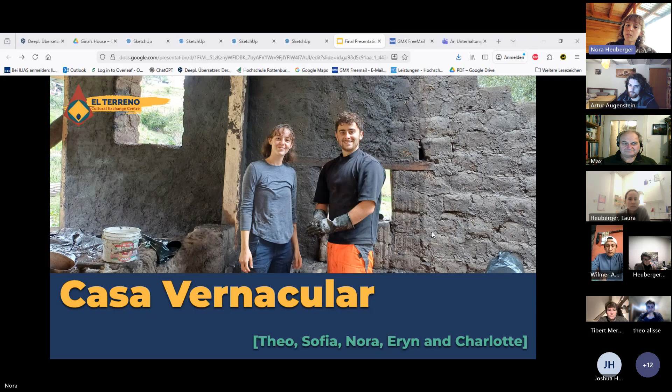I'm going to start with a quick introduction from everybody who participated in this project. It's only Theo and me today presenting, but there have been 5 people in general working on this project since, I think, the beginning of July, August. And the first person to come here was Sofia from Switzerland. She was an architect and she started the whole process of this housing project. Sadly, she can't make it. As well as Sofia, Eryn was here from England. She was an interior designer and worked mostly on the furniture that could be built inside of the house. We're going to see a little bit about that later on.

That's me. My name's Nora. I'm from Germany and I'm a civil engineer and currently doing my master's in resource efficient construction with a focus on natural materials and resource efficiency, which is mainly why I'm here to learn techniques from other cultures who focus as well on the use of natural materials and being sustainable for our future.

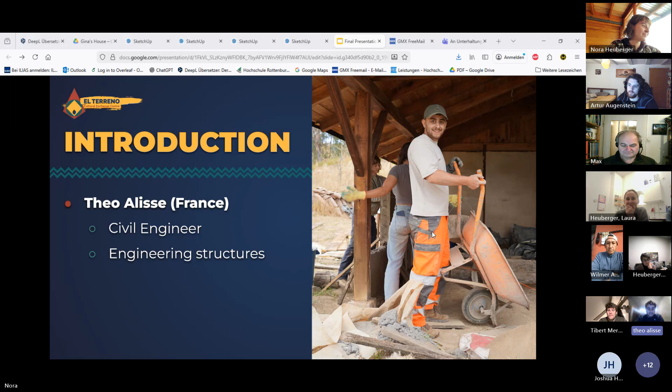So, hi to everybody. My name is Theo, and I'm a civil engineer from France. I have a diploma in engineering structures, so it's not exactly what we're doing here, but I think it's fine. The last person in the project is Charlotte, who is a landscape architect, and she helped us for a few weeks, but unfortunately, due to personal reasons, she couldn't keep going on the project. But we're grateful for her.

So the agenda of today's meeting is going to be first a little bit of context on the project. Then we are going to see our research on the local needs of local populations and how our visits helped us this way. Then the more practical research over some technical details, more engineering and architecture stuff. Then the design evolutions of mostly the floor plans and the other views Sofia designed. Then the technical development, which is mainly engineering work. Then pricing and timetable, and then a little conclusion and the next steps the future interns could take on.

So to talk a little bit about the context of the project, we are currently in Ecuador, in Guaranda, one of the very rural areas in Ecuador, where the traditional way of housing is using adobe and a lot of madera. Sorry, adobe is a clay product, and madera is the Spanish word for wood. You can see that I have been talking a mix of Spanish and English for a long time now.

So yeah, with all these challenges, we've decided to focus on making really good research, making really nice plans, and then leave some work for future interns to come and hopefully take this project further. Yeah.

So one of the first challenges we had was to define what the local population needs, because for me at least, one of the first things I realized coming here is it quite brought me back to reality, and there's still some really modest population, especially here, which maybe would only afford a house for a few thousand dollars, which is absolutely not what we're used to in Europe, of course. And so we needed to meet some people, to talk with them, to have maybe some studies of anthropology, how family works.

Can you switch the slide, Nora, please?

And just to try and realize what is their way of living, what are their traditions, what are their beliefs, how family works there, and all of those things would then let us define how to utilize the space. What are the priorities if we are building a really modest house? What is to be prioritized and what maybe will be done years later, or maybe not. And so we needed all those answers to then be able to come up with an architectural plan and designs.

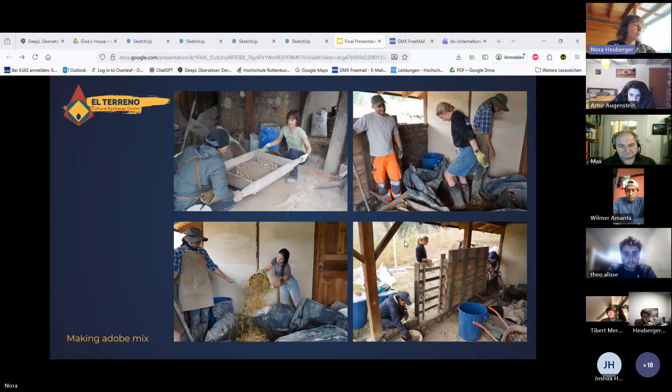And the next step then is to add water, lime, mostly horse poop and straw, and then mix it with our feet. In this case, it was Eryn and Fernando mixing the adobe mix. And yeah, in the last picture, you can see a little bit of the building site. So we had to put up different work frames because some materials can be built up by themselves. The first one, on the left-hand side, it's just adobe bricks. You don't need a wall work frame for that.

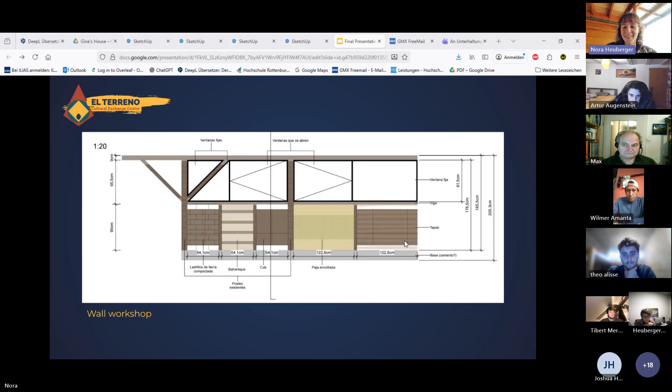But for bahareque, for cob, and for paja encofrada, and also tapial, you need a work frame. So this is what you can see in this picture. And in the end, it looks more or less like this. So the first one on the left-hand side is adobe bricks, which we found was the fastest, but you would need experienced people. Best case scenario, you need builders to build these kind of walls for precision and a very good outcome.

The next one is tapial. It's just rammed earth. So a really great method to just use the soil you have on hand at your building site. Then the next one is paja encofrada, which means it's a compacted straw and clay mixture, also kind of rammed into a working frame. Then it's cob. No, sorry. First comes bahareque, which is also a straw and clay mix, but it's put on top of a skeleton, which makes it pretty fast.

And the last small wall we can see is then cob. It's the same mixture as before, but brought into layers, which takes quite a lot of time to build up. I think in the end, it took me about 2 weeks to finish that wall because you have to wait for the layers to dry, which makes it obviously not as useful because it just takes a lot of time.

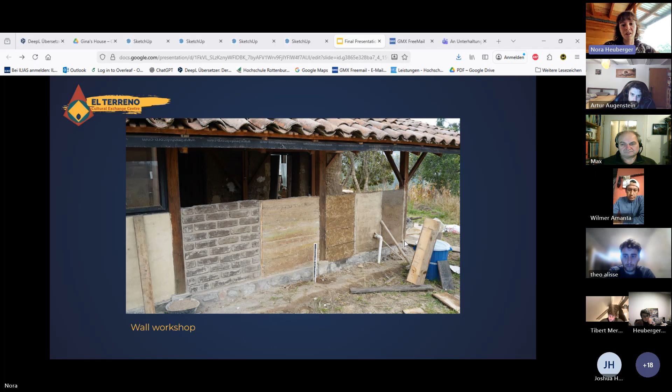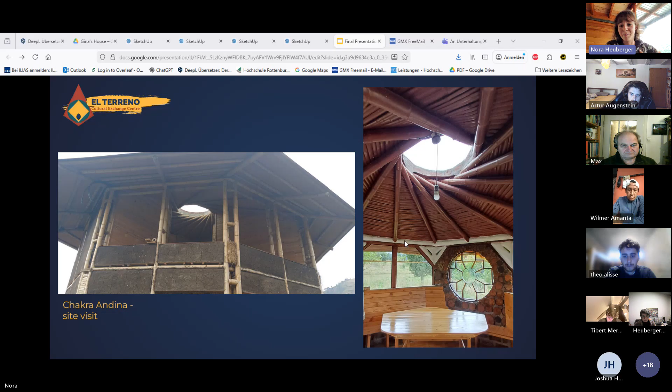Besides the physical work at the wall workshop, we also visited Chakra Andina, which is a very nice place close to Riobamba, where they have built several lodges for tourists using bamboo and tapial, a lot of natural techniques, which was very inspirational to see and very beautiful, in my opinion.

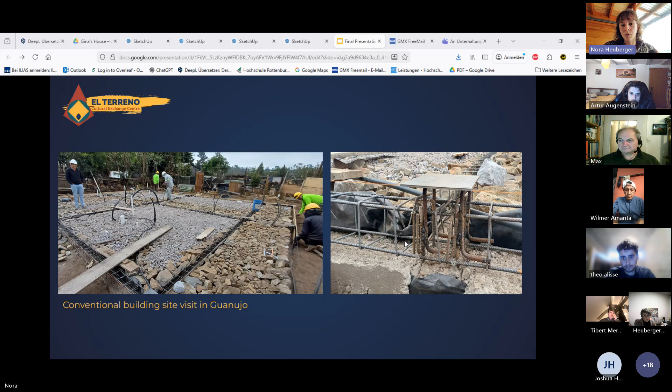Also, we visited some building sites with some engineers from Guaranda. This is a building site in Guanujo, very close by, where we could see how they built their foundations here, using a lot of stones they just have on hand at the local building site, which means they can reduce the use of concrete. And the right picture is showing a connection between a pillar and the foundation, which makes it really safe for earthquakes, which is something we have to keep in mind in this area.

Then I spent a lot of time at Daisy's house. Daisy is Wilmer's cousin, and they are rebuilding this, I think, 150-year-old house made of adobe. And I spent about 3 to 4 weeks there to help them build the roof, which was very exciting, to see them doing this very simple connection, you could say, but all with their hands, not a lot of machines were being used. And that was very, very exciting and very instructive for me.

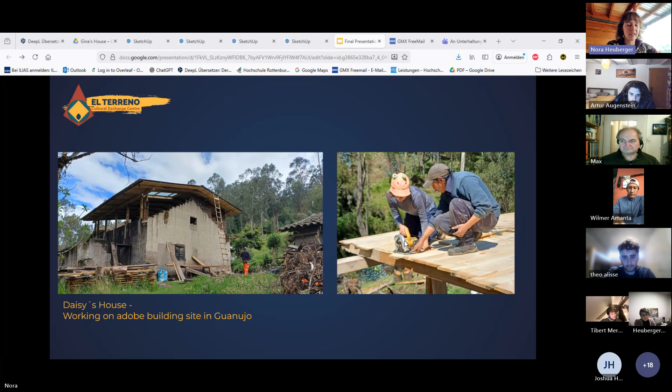This is one of the connections between a pillar and a beam. Yeah, it takes a lot of practice. I tried to do the connection by myself. I failed. It was really nice to see the maestro doing it very easily.

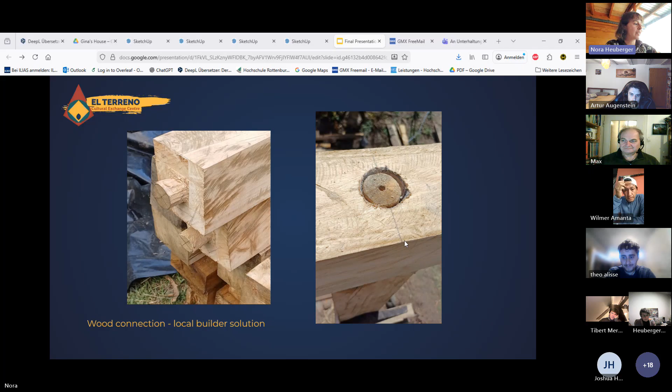Yeah, that's how the connection looks from the side. So this Z kind of connection is there to really be able to hold together in case of an earthquake. And the wood didn't fit really well together, so they just used cement to fill in the gaps, which was something very new for me, but seems to work.

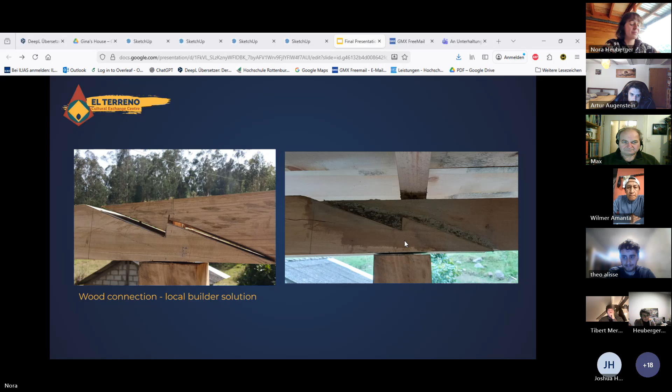Yeah, and there was more work like nailing roof planks on the roof beams, and on the right side you can see Theo finishing up some adobe walls.

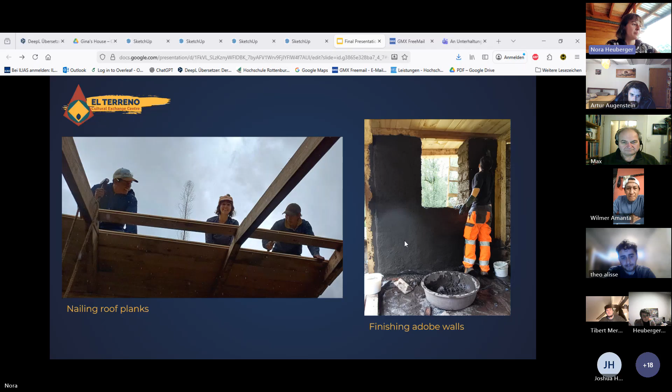Yeah, can we go to the next one straight?

So on the design evolutions, of course, as Nora said, the first intern that was here was Sophia, and Sophia was also in architectural studies, and she was the one designing the first floor plans. So that's what they look like. There's the floor plan on the left, and there's some views on the right. And as you will see later, the structure is globally the same.

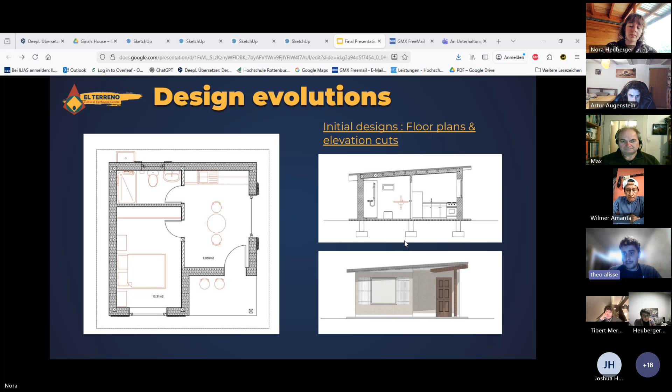So the idea was to have a 6x6 house with a pillar every 3 meters, which would make it square and modular, so that we can then adapt really easily to any sun orientation, anything, like maybe if the view is nicer east, the orientation of the house would be different, and all that kind of stuff, so that we could keep really one model and adapt it to every family that needed it. That was the initial thought.

Can you pass it, Nora, please?

And then our anthropological studies taught us many things, especially that, unlike maybe in our countries, several generations of a family would usually live together, which means that, for example, if the base target was only a couple with 2 children, now you probably need to add maybe a grandmother, maybe a grandfather, maybe both, which would mean you need more space, or at least you need to maximize the number of rooms you are going to have in this space.

Also, we learned that families are meant to grow, and when families are growing, people are not necessarily leaving the house, which means you again need some more bedrooms or some more space for maybe another little family, which means you might need to extend the house. What we have seen here is a lot of reinforcement in the pillars, or left open, so that maybe years later a family would be able to build another floor on top of the house, which we thought about, but it's not as easy if you're using natural materials.

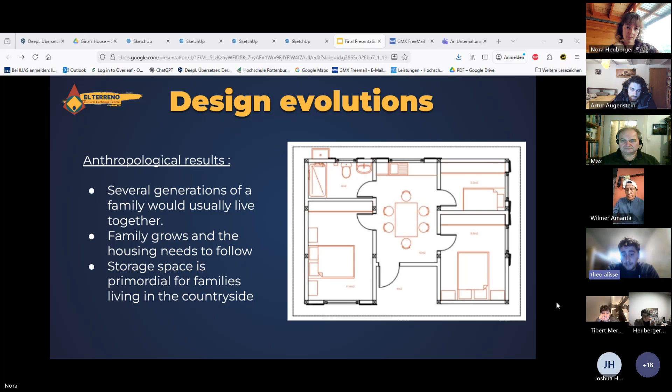And after a discussion with Wilmer, we realized something was really missing in our designs, and it was storage spaces for the families, because all of the families that live here usually have or grow a lot of stuff. Could be corn, could be potatoes, could be anything, and they will need to store it. So Wilmer told us that 20% of the space of a house should actually be a bodega, which means a storage place. So you'll see in the next plans we have thought about it.

Can we pass it, please? Perfect.

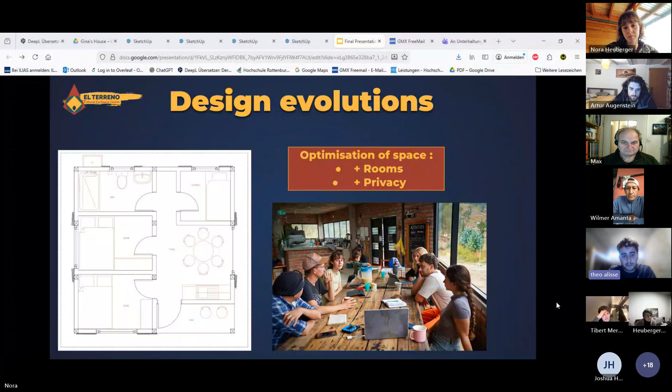And we can see here that we reduced the spaces of each room a lot and tried to get the most out of it. So we tried to get 3 bedrooms instead of 1 or 2, which could then be a house fitted for a couple, 2 children, and maybe a grandmother. So the main word was maybe more rooms, because they don't want to share a room when they're growing older, and they want to have privacy as well, which is absolutely understandable. Can we pass it, please?

So after a few weeks, Sophia went, and we didn't have any architect left because Charlotte only stayed for 2 weeks. And so I tried to make some floor plans, which are more technical and less pretty and finished. But that's the final design. The little extension you can see on the left would be the bodega, the storage space. Above that is what we would call here a piedra de lavar, which means a washing station, which is really useful for the families of the camp.

And then we have 2 bedrooms, one for the parents, ideally, and a smaller one for the children, with probably bunk beds. Above that is space for a bathroom, and then the biggest room would be a kitchen and a living space. We also added a small partition between the bathroom and the kitchen to prevent odors and that kind of stuff. And the idea was to keep every room that needed water on the same side of the house, to make it easier. So yeah, that's the final design someone could take over.

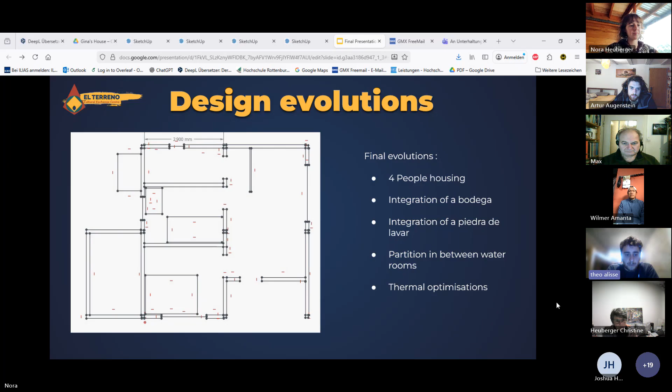Yeah, okay, I'm going to take over and talk a little bit more about the technical side. When I came here, as you could see, the structure was kept pretty simple, which makes it quite easy. So we have a house 6 by 6, and every 3 meters a pillar. And we thought about using as much wood as we could, because there is a lot of wood around here. We have a lot of eucalyptus trees, and Joshua had some eucalyptus wood already cut down into pillars, more or less.

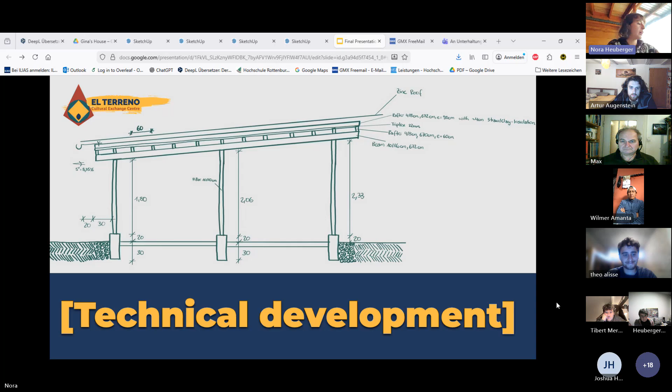So it was obvious that we would try to use as much as we could of that to build a kind of exhibition model around here to show people who might want to build one of our houses how it could be done, how it could look. And yeah, this is the main concept of the structure.

Use just point foundations to reduce the use of concrete, then on top of the foundations, pillars every 3 meters, and then big beams in one direction, smaller beams in the perpendicular 90 degree direction, and then a roof construction on top of that holding insulation. It's unusual around here to make the effort of insulating the roof, but it's one of the main reasons why houses are really, really cold. So we really wanted to include insulation.

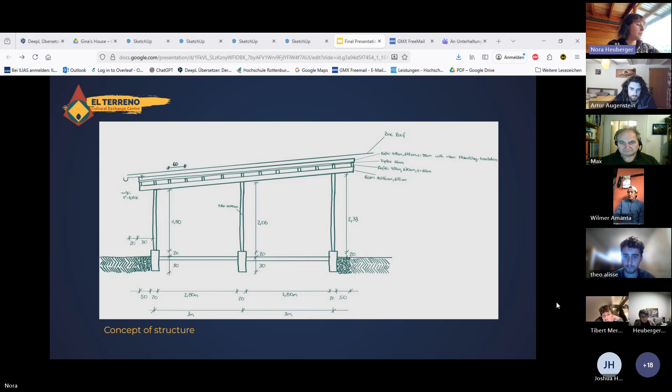Yeah, that's just a 90-degree turned view of the pillars and the structure. Yeah, the first idea was, as I already said, to use eucalyptus wood for the construction. And my first idea coming from Germany, and sorry, I have to point out one thing before.

When we counted the wood that was available already, we quickly saw that the pillars or the wooden pieces are too short for the 6x6 house. So we would need to connect every single beam in at least like 2 positions, which is not really a problem, but it is some work. And my first idea to connect those beams and rafters was this slide here. So pretty simple, just some bolts, just some overlapping.

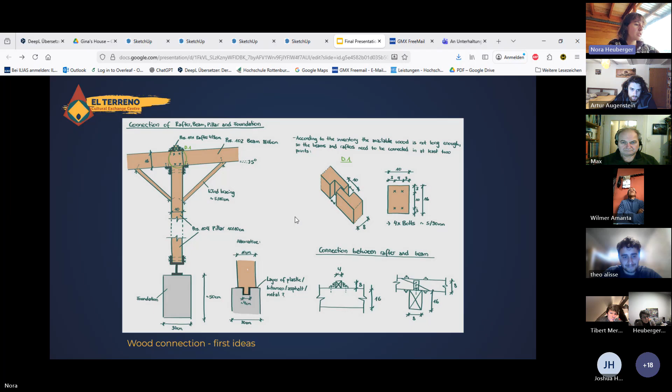And I was taught a lot when we went to see some engineers in Guaranda. They were very clear that this wouldn't work how I imagined it, because we're in an earthquake region, obviously, and you're supposed to have a bigger overlap of at least 20 centimeters between each beam, and the connection should look more or less like this, so it can really grip into each other.

And also the connection should never be on top of the pillar, but around a third of the distance between each pillar. I'm not getting too technical here. But yeah, this is just to visualize the loads that are being put onto the beam. And as you can see, about a third around every pillar, the load is the lowest. So that's where we would do the connection, from an engineer point of view.

As you can see in the next picture, local builders have a very different opinion about that. A lot of builders we talked to, and also the construction site I've been working on, would do the connection way simpler. This was the connection we saw in pictures from Daisy's house. Some builders said it would even be enough to do the connection like this, and just put a spiegar, how would you say it in English? Just kind of a wooden nail, a spike, on top of the pillar and connected with the beam like this.

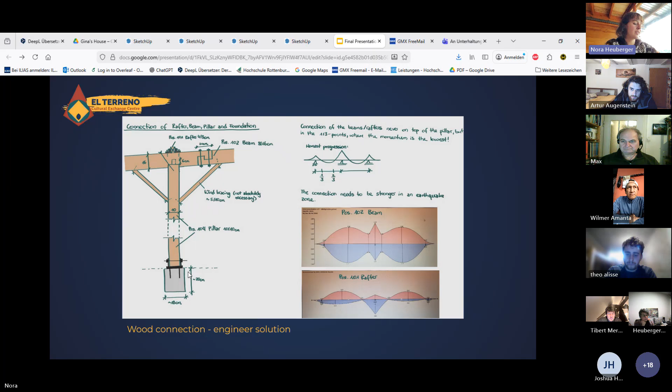And on the bottom, you could do a bottle-size spiegar as well, and just put it in the concrete. So much simpler, much easier to do, and obviously way cheaper. Because as you could see, the engineers wanted to have this metal construction here, I showed you on the picture in the beginning on the building site, and the local builder said, no, we don't need any metal here. Let's just do it like this.

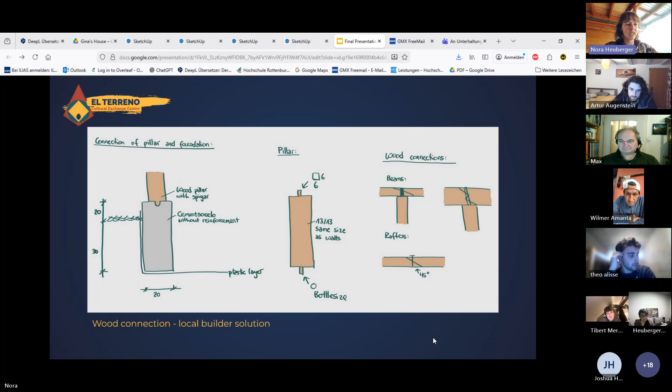So yeah, that was really interesting and a big part of this internship, to have so many different opinions, and to have really experienced people that have built their houses like this for a long time and it's working. And then on the other side, engineers with a lot of experience as well. And we kind of tried to find a good middle way, which would be affordable, but also safe and nicely done.

And I'm going to talk about the roof construction a little bit. As Theo already said, I'm not going to talk about the insulation. We tried to research a little bit of how to work with bamboo, because bamboo is really cheap. It's very available here, and you can get it in long pieces as well. So we wouldn't have to do all these connections with the wood we have on hand.

But bamboo is hollow inside, so the connection of beams and rafters is a little bit more complicated. I'm not going to go into too much detail, but if we would build a house with a bamboo construction or a mixture of wood and bamboo, there would be a special builder needed, which could make the whole thing a little bit more expensive, but we don't know that exactly.

So it's, in my opinion, a really interesting way to build, because it is a local material, it is cheap, and bamboo is called natural steel, and it is really strong. So yeah, I think it would be interesting to explore that more.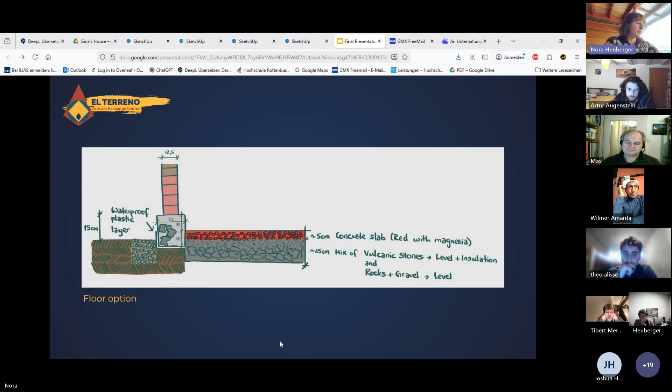And to make it as thin as possible, we would use a mix of rocks and gravel underneath, and also some volcanic stones, which are very cheap around here and could make a little insulation in the floor. And this is the idea for the foundation. Again, as I already said, we're going to use point foundation to use as little concrete as possible, a little metal reinforcement, and then this kind of socelo. Again, using stones as well, so we don't need concrete for the whole volume. And then on top, the wooden pillar.

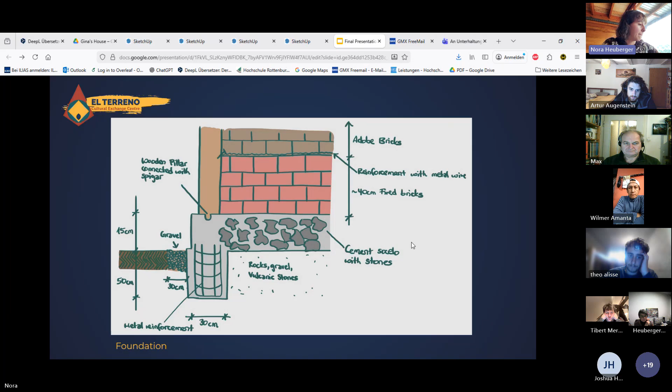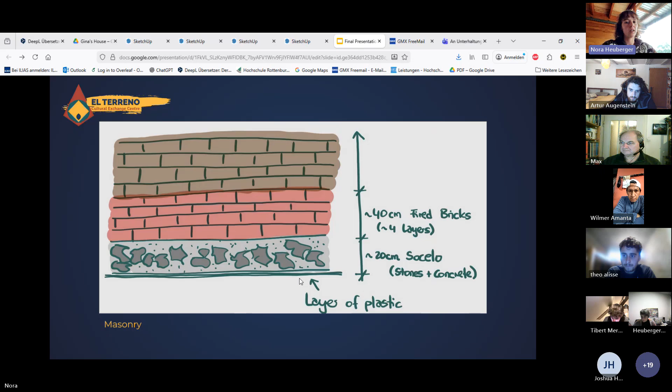And we've planned now with adobe bricks and fired bricks. Yes, this is the wall type we decided on. As I already said in the workshop, it turned out that the bricks are the fastest way, and we tried to use as many adobe bricks as possible instead of fired bricks, because they are a little bit cheaper and don't need the energy to burn. So it would be a little bit more sustainable as well. And here it's really important to have a layer of plastic underneath, then the socelo, and then fired bricks, about 4 layers, just to get the adobe bricks out of any moisture, because adobe bricks are not fired, and therefore they should not be in too much moisture, and also kept out of the rain as much as possible.

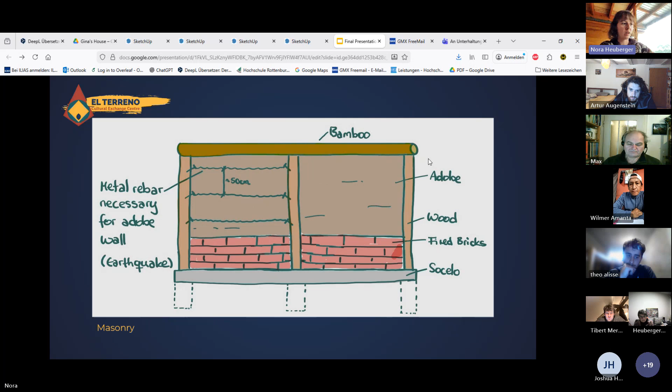This would be the structure: every 3 meters a pillar, and in between the masonry. And for adobe bricks especially, we would need these metal rebars about every 50 centimeters, because otherwise, with the adobe drying out over time, there can be cracks, and to prevent that, we would need the metal rebar. And in this version, we would have bamboo on top. And this is just to show how the windows would be constructed. There would just be a wooden piece on top, and this distance should be between 20 and 30 centimeters to distribute the load of the wall above the window into the wall.

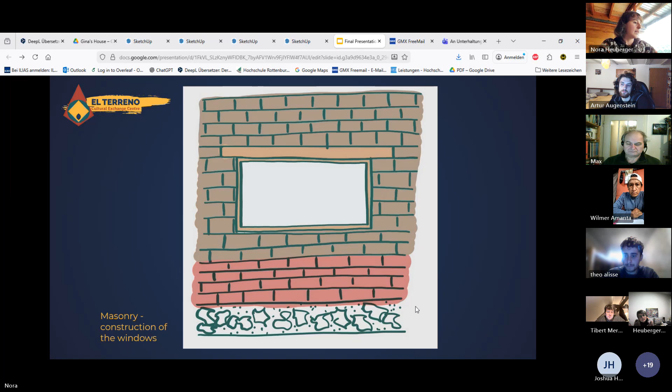Yeah. Back to you, Theo. Oh, no, sorry, not back to you. I'm going to show my models first. I'm sorry.

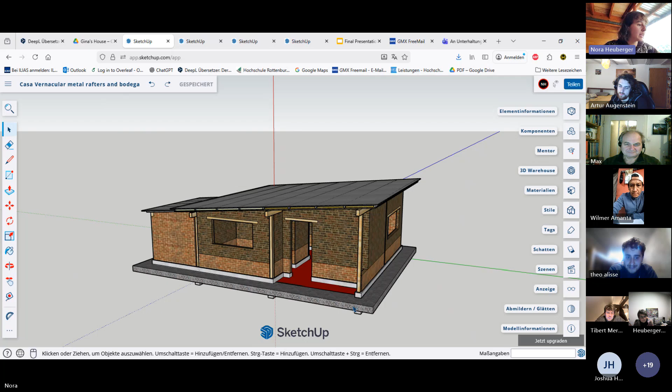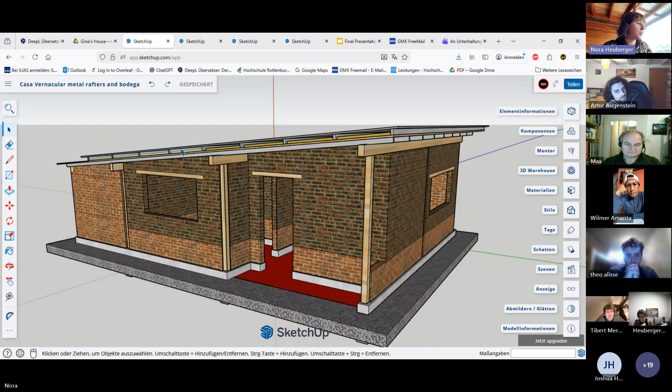So in lack of a CAD program around here, I focused mainly on 3D modeling of the house. This is what it would more or less look like. Around here is no concrete, it's just gravel to have a surface to walk around the house. And the red concrete floor, the fired bricks on the bottom, and then adobe bricks above, wooden construction, and then the roof, where you can see that there's insulation in between. We want to do straw insulation because that's very available and very cheap around here. Then just make sure to close everything with mesh, so no insects and animals can get into the roof and make themselves a home.

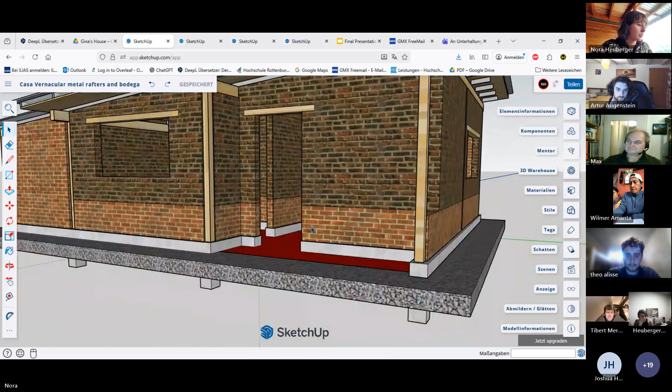Yeah, I can try to take off the roof so we can see inside. No. Oops.

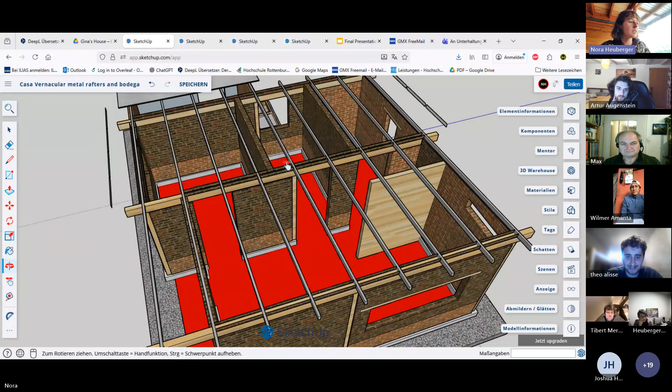Okay, so again, this would be the big bedroom for the parents, a smaller bedroom for children, maybe with bunk beds. Over here would be the bathroom, and then a little partition wall. We would have some storage space over here.

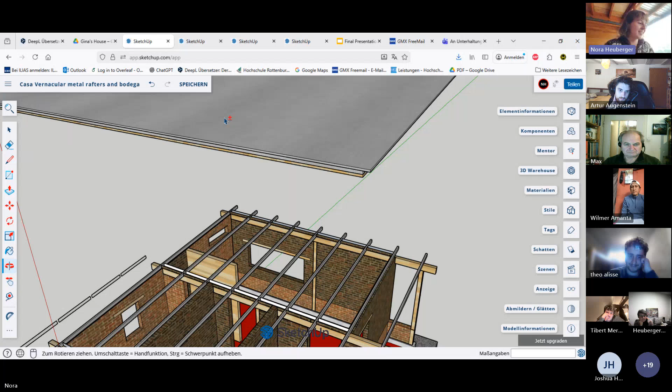Then the kitchen area. In this place exactly, we would have the view of Chimborazo through this window, which is a beautiful mountain. And yeah, over here, sorry. Sorry. Yeah, over here, just more space for a couch or something.

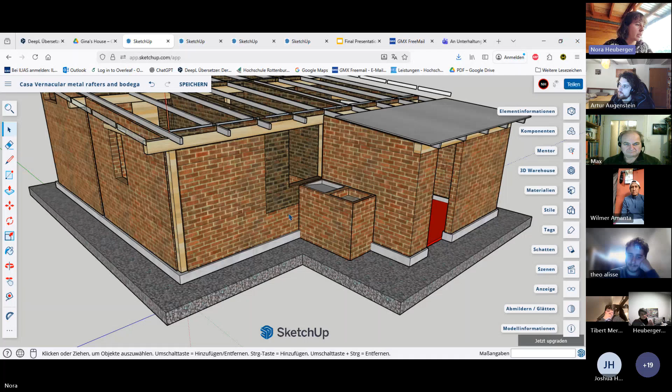And then over here is the bodega Theo talked about. In this case, pretty big. But yeah, as we already said, there's a big need for that. And as well, a washing station. A lot of people here don't have washing machines, so it's just hand washing of their clothes. Yeah. So that's more or less it.

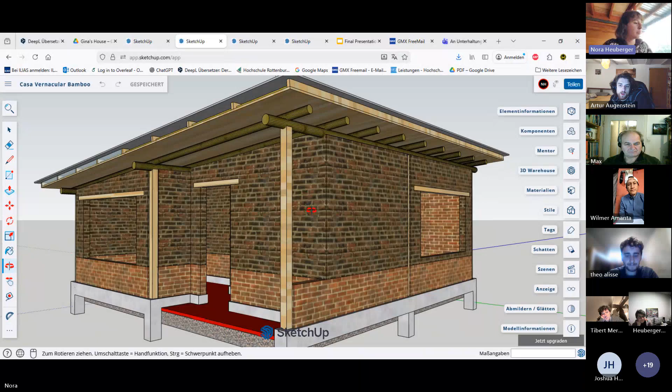And I made different versions. I'm going to show really quickly. This one would be with the bamboo beams and rafters, which would look nice. It would be possible to do these pillars out of bamboo as well. Again, need to explore the connection of that a little bit more.

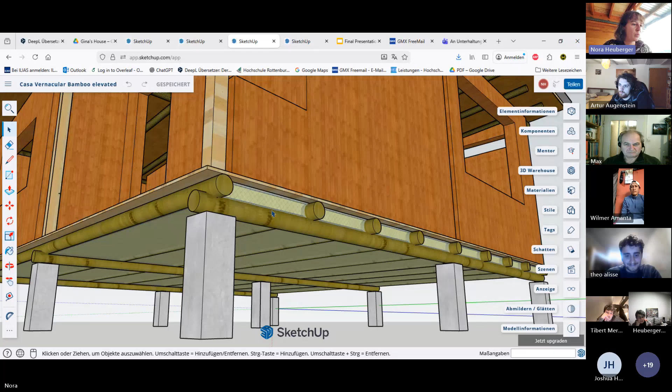And this one is a wild one. Here we would use a lot more bamboo, and we would try to elevate the whole house, which would leave us with room for real insulation, which would make the house way warmer overall. And the walls could be, instead of fired and adobe bricks, out of straw, or yeah, one of the techniques we tried out in the wall workshop.

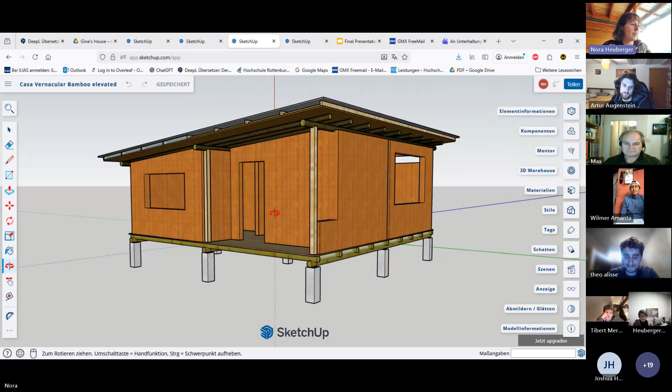So yeah, I think that might be really interesting. It's heavily inspired by Chakra Andina, one of the sites we visited, and yeah, definitely needs more research. I hope somebody takes that over.

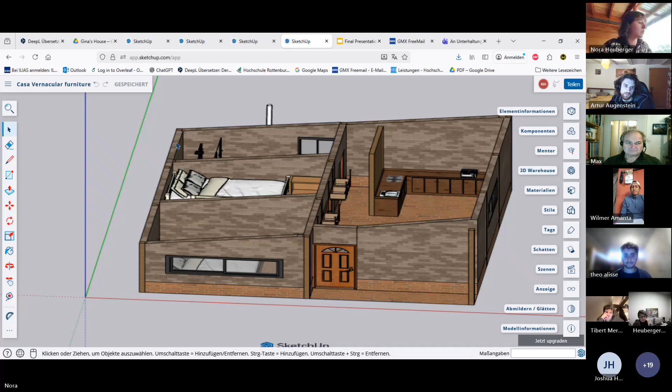Yeah, and to show, wait, okay, sorry about that. To show Erin's work before I'm done. She put a lot of work into working out how this tiny space could be used the best way. So we have a lot of storage space above the doors. We have the idea of bunk beds in the children's room, maybe even with space underneath the bed for them to work or do their homework.

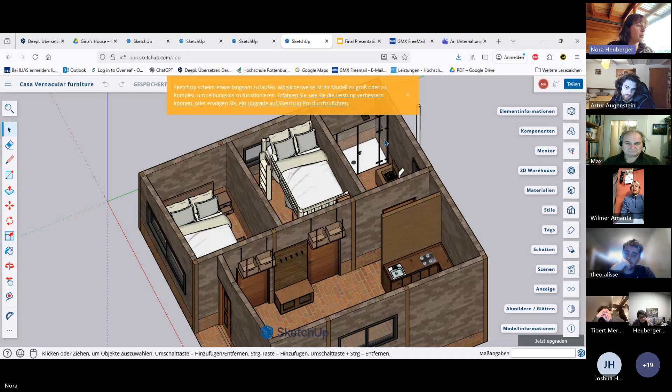Yeah, the bathroom with a pretty big shower, I would say, and a compost toilet, which was one of Joshua's biggest wishes, to reduce the use of water or the need of water. And what else can I show? Yeah, the kitchen looks nice.

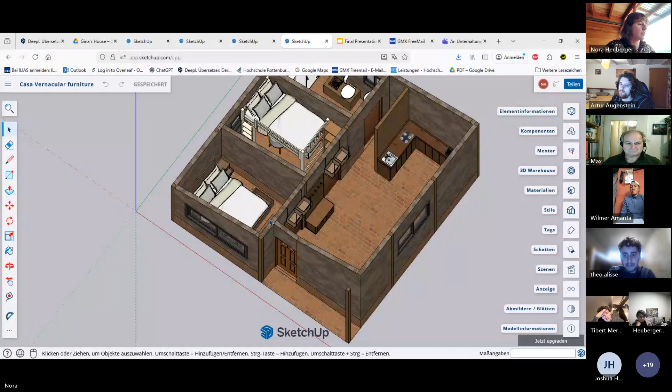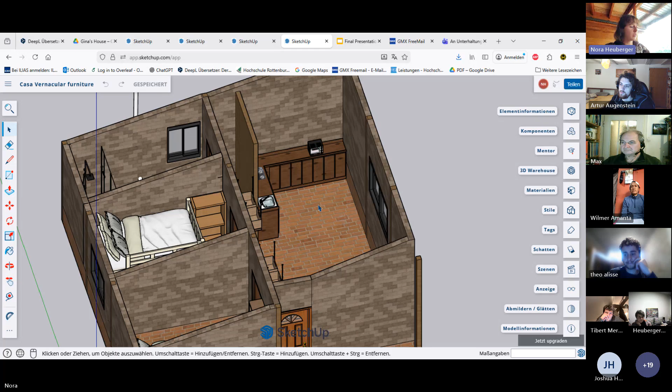And yeah, in general, it was an idea to sell these houses with inbuilt furniture to make the most of it. But obviously, that would be an individual decision as well for everybody, if they want to use their own furniture or make up their own designs. Yeah, back to you, Theo, now.

Yeah, can we go straight to the next one, please? So, yeah, as Nora said, we, for almost everything, had different options. And as we said a bit earlier in the context, a huge part of it was to try and build something for relatively modest families. So not more than a few

thousand dollars. And as you can see, for example, when you're exploring the different options, if it's for rafters, all of a sudden you're using metal and you need like $400 more only for the materials. So as Nora said, bamboo might be a little bit trickier and more expensive to use and to work with, but in the end, it might still be a win.

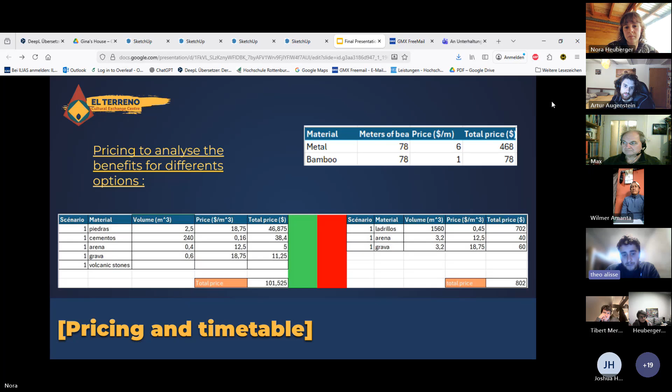Same thing for the floors. I'm sure a floor with some cooked bricks would have been very nice, but it would have been more expensive for sure. Can we pass it? So that's a bit what we used as well to make some decisions, to try and find the right balance between having a nice and comfortable house and at the same time trying to stay in a modest budget.

And that's about what we come around, maybe between $2,000 and $2,500 for the materials. And then of course you will need to add the price of the labor.

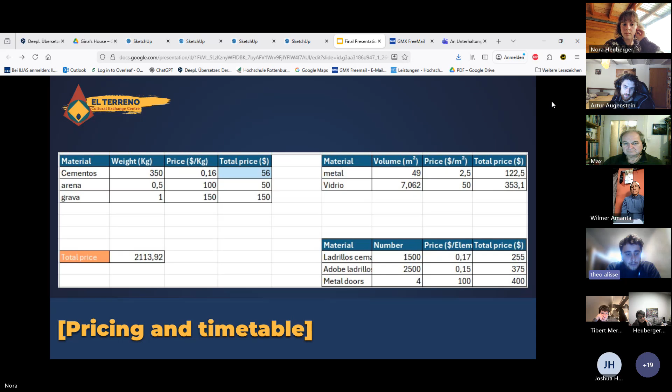Then we pass it. What we use as well is timetables. So we used it as a group and kind of as a small company to try and follow up with each person's task and try to set up some milestones as well. And can we pass it, please?

What we imagined as well is it's something that would be really useful for when you're actually building the house or anything. And so we worked a bit on one, which unfortunately didn't happen. But the idea was, if we were building it, it would have needed to be within 1 month, which of course was really, really short and hard.

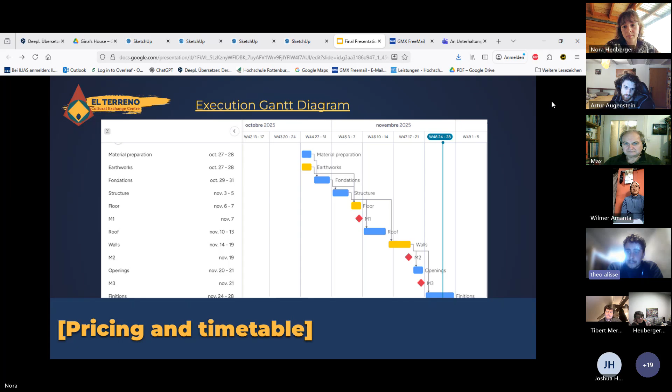And especially when you're building something, there's always some surprises and some things that are going to go late. But yeah, we did a first try, and probably the next people that are going to actually build it can use it and rework on it a little. Can we pass it, please? To give a conclusion, can we go straight to the conclusion?

Yeah. So the whole idea of this project was, of course, as Nora showed, try to find solutions, try to be sure that technically we are ready, but also having to find a balance between, for example, being affordable and the sustainability, which of course we all want to use no concrete or no metal and only natural material, but unfortunately that's not the reality of the population living here. And so we have to try and do our best to give them a nice balance between affordability and sustainability.

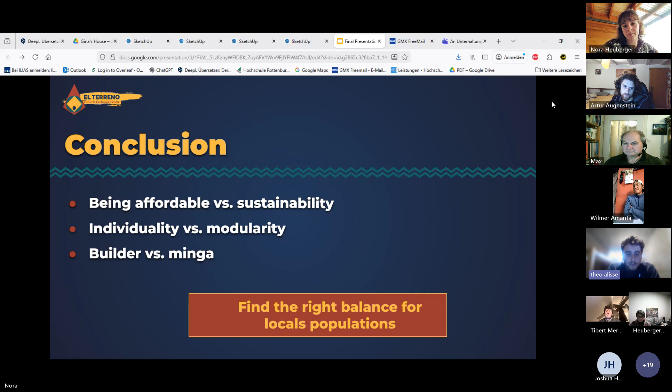And it was quite the same thing with everything, because, for example, paying builders or having a minga, we didn't explain what a minga is. A minga is everybody around you, so your family, neighbors, trying to help you build something, and then maybe 5 years later you will help them build something. And that's something that is still really a reality here, and from what we have heard is quite losing itself, but it would be a really nice way to make some economies and just arrive to build something really nice for them. Can we pass it, please?

We wanted to say to Joshua to keep calm, because I'm sure help is on its way, and yeah, the next people I'm sure are going to do a great work with this project. So thanks a lot to everyone for listening to us today, and yeah, I think Nora and I are really grateful to have been part of this project. So thanks a lot.